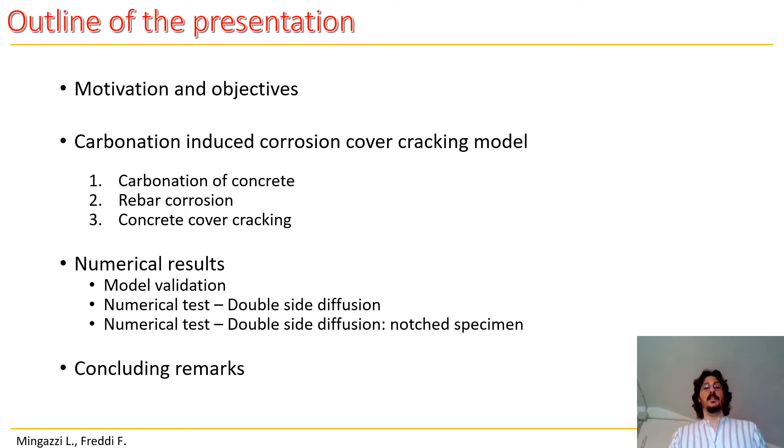We decided to focus on this topic because the corrosion of reinforcement bar is one, if not the most common, degradation phenomenon for reinforced concrete structures. Due to the corrosion process, the cross-section area of the rebar suffers a reduction, which translates into several safety issues that might arise in the structure, such as a reduction of the bearing capacity, a reduction of the ductility, and a reduction and/or complete loss of the bond between the concrete and the steel rebar.

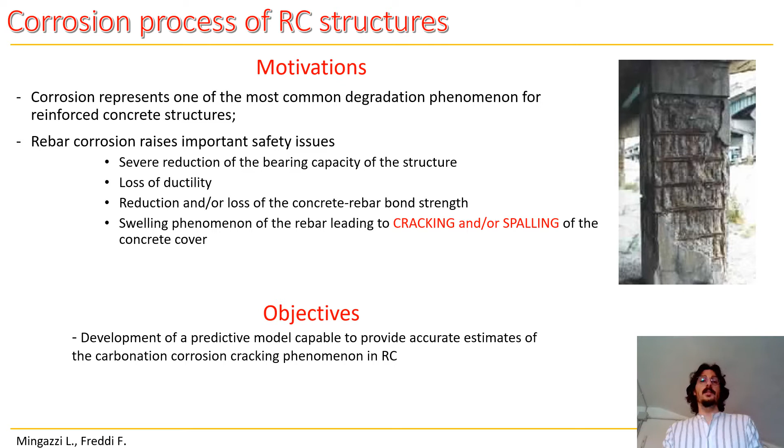Moreover, due to the formation of rust deposits around the reinforcement bars, a swelling phenomenon might happen, leading to cracking and spalling of the concrete cover. We decided to focus particularly on this last aspect, and we aim to develop a predictive model capable of providing accurate estimates of the carbonation-induced corrosion cover cracking problem for reinforced concrete structures.

The full phenomenon could be subdivided into three different phases. The first consists of the carbonation of the concrete, which happens due to the diffusion of pollutants present in the air into the concrete pores, which leads to a reduction of the value of the pH of the concrete, especially around the rebar.

This is a critical aspect, since the reduction of the pH leads to a depassivation of the steel rebars, and the corrosion process can start from the oxygen and water in the proximity of the reinforcement bars. Due to the corrosion process, rust deposits might form adjacent to the rebar and create a swelling phenomenon, which leads to overpressures in the surrounding concrete, which might suffer from cracking and spalling phenomena.

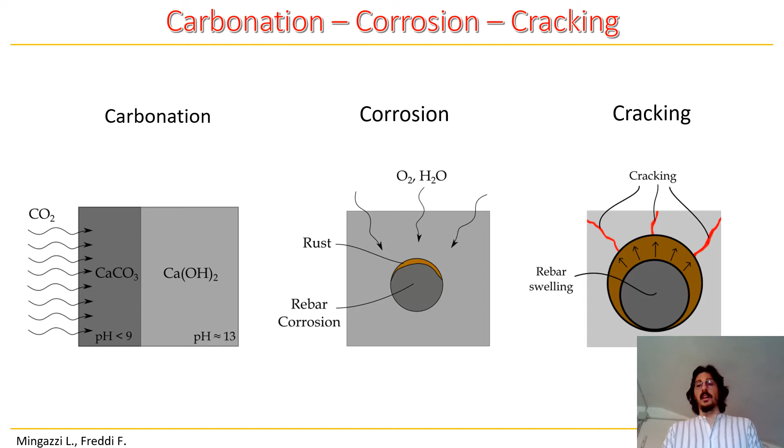The carbonation process takes place and starts with carbon dioxide diffusion within the concrete pores in gaseous form, and eventually it dissolves into the pore water as well as the calcium hydroxide present in the cement paste, and they react together to form calcium carbonate, according to the neutralization reaction reported in the presentation.

The calcium carbonate is, however, less soluble and occupies a larger volume compared to the calcium hydroxide, which leads to the phenomenon of pore clogging. Therefore, this translates into a lower porosity of the concrete, and a change in the mechanical properties of the concrete as well.

Moreover, the value of the pH is lowered, and once the carbonation front reaches the steel rebars, the depassivation of the steel rebars takes place as well.

In order to account for the changes in the material properties, we introduce the material modulation function, which is a function of the ratio between the current concentration of calcium hydroxide compared to the initial concentration.

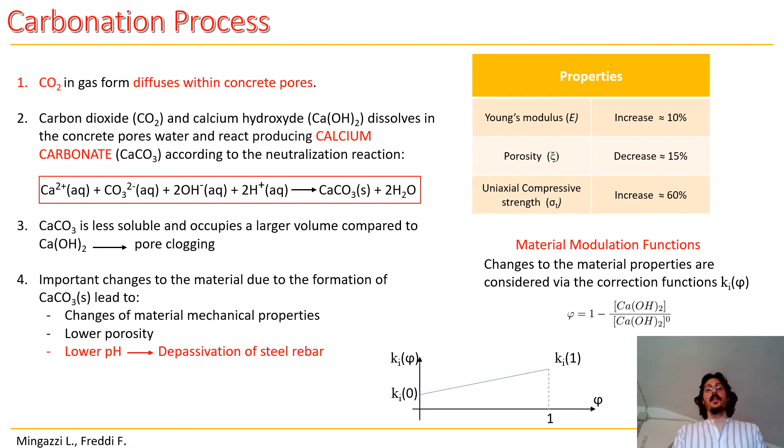The model for the carbonation process is based on the standard diffusion reaction equation system. For the carbon dioxide, the diffusion part is governed by Fick's law, with a diffusion coefficient which depends on the carbonation and the damage state of the material: the first to account for the change in porosity, and the second to account for the fact that CO2 can freely move through cracks in the material.

For the reaction part, the reaction rate is multiplied by the porosity and the volume fraction of the pores partially occupied by water, because it represents the actual condition in which the neutralization reaction takes place. For the calcium carbonate and the calcium hydroxide, we have only the reaction term. For calcium carbonate, it accounts for the formation of new material, while for calcium hydroxide, it accounts for its consumption during the reaction.

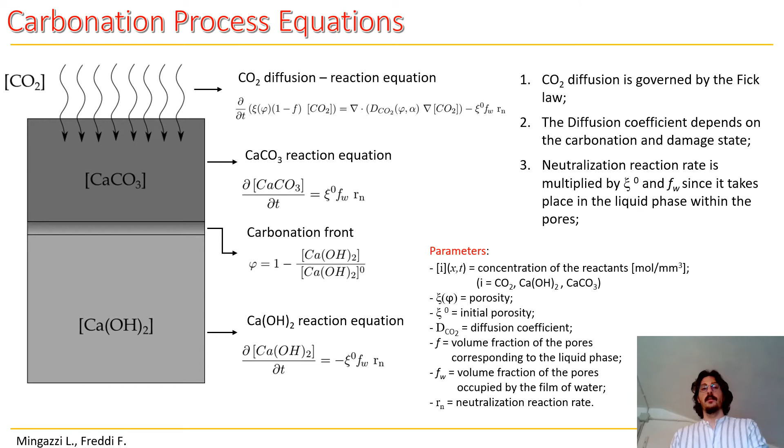Once the carbonation front reaches the reinforcement bars, the passive layer protecting the rebar from corrosion is lost, and therefore the corrosion process can start due to the presence in adjacent areas of oxygen and water.

The carbonation process leads to a generalized depassivation of the reinforcement bars, which translates into a generalized corrosion process. The corrosion process is characterized by two semi-reactions, one for the steel anode oxidation and the other for the oxygen cathode reduction, which when summed together provide the complete corrosion reaction.

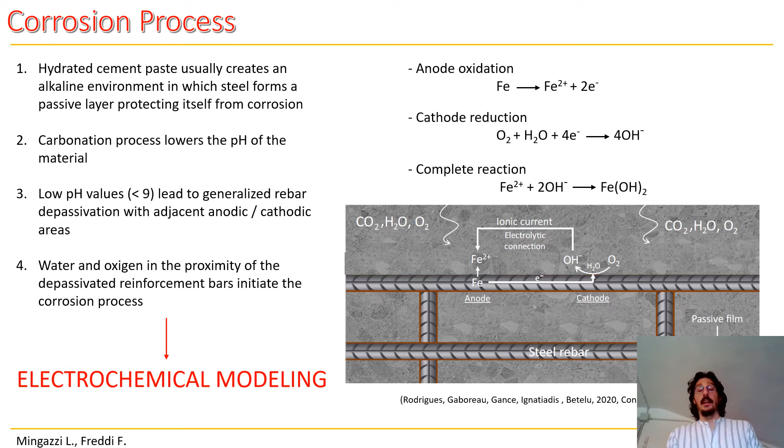In order to model the corrosion process, we adopted an electrochemical modeling approach. The electrochemical modeling is structured as follows: first, we calculate the electrical potential for each of the two semi-reactions via the Nernst equation. Once we have the two potentials, we can obtain the value of the corrosion current density using the Butler-Volmer equation.

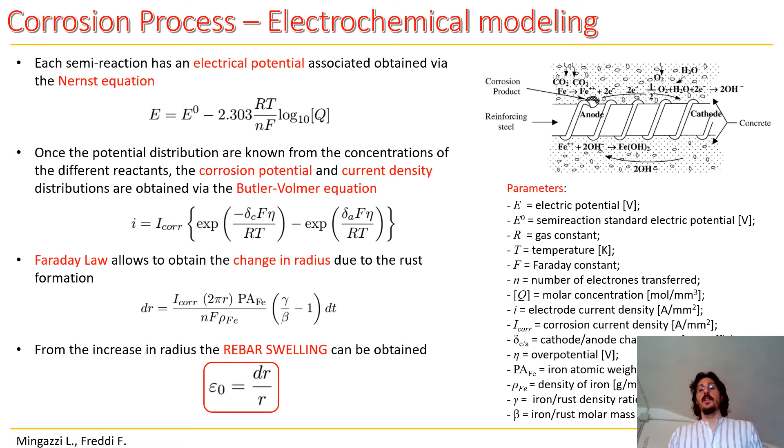Once the corrosion current density is known, it is possible to evaluate the change in radius due to the formation of the rust layer using Faraday's law. From the change in radius, we can then obtain the swelling associated with the rust deposits by dividing the change in radius by the value of the initial radius of the rebar.

Once the value of the swelling associated with the formation of rust deposits is known, we can proceed to describe and model the cracking or spalling phenomenon of the concrete cover, and we choose to approach this problem via the phase field approach for brittle fracture.

This is a variational approach based on the Griffith theory of fracture for brittle material, where damage represents a transition between the broken and unbroken areas of material and is represented using a scalar smooth field. Crack nucleation, formation, and evolution is described via the minimization of a two-field energy functional, which depends on the displacement field and on the damage field.

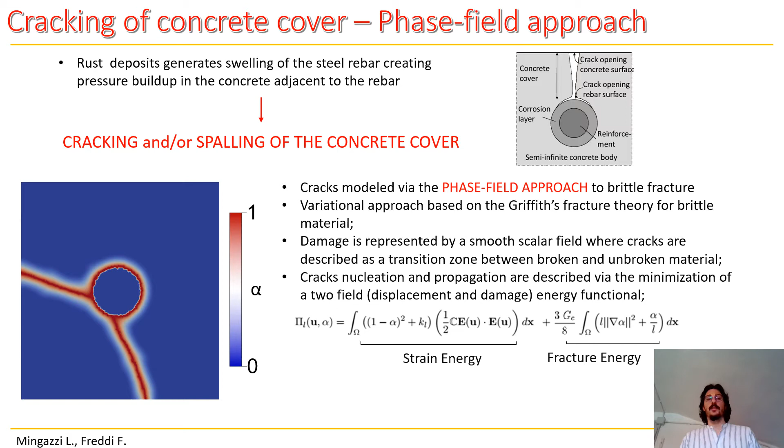In the phase field model we use to describe the formation of cracks within the concrete cover, we considered a traction compression energy split for the concrete strain energy, allowing the damage field and the evolution of damage to apply only into the areas under traction condition.

For the steel, for the rebar strain energy, we consider only the elastic part of the strain tensor. This permits us to introduce the swelling obtained from the corrosion process as a loading parameter.

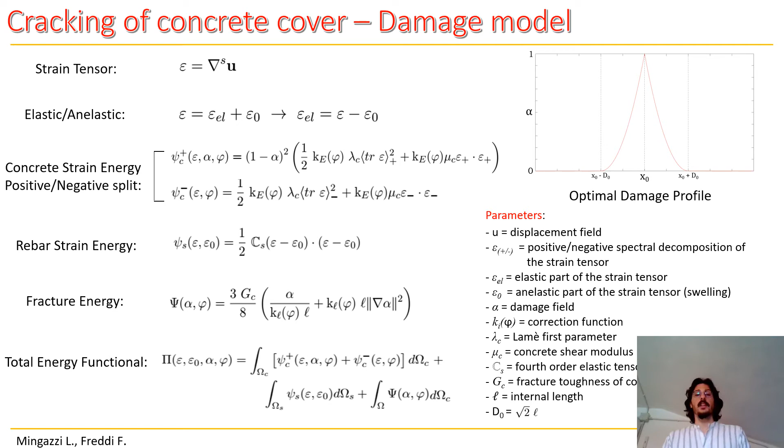It should be noted that for both the strain energies as well as for the fracture energy, material modulation functions are included in order to account for the changes in material properties due to the advance of the carbonation front. Lastly, the total energy functional is obtained as the sum of the different energy terms integrated over their respective domains. The complete numerical model is therefore structured as follows.

For every time increment, we solve first the carbonation problem, obtaining the carbonation profile and the value of the pH inside the concrete. If at any point around the rebar the pH is lower than 9, then we can solve for the corrosion process, obtaining the swelling associated with the rust formation around the rebar.

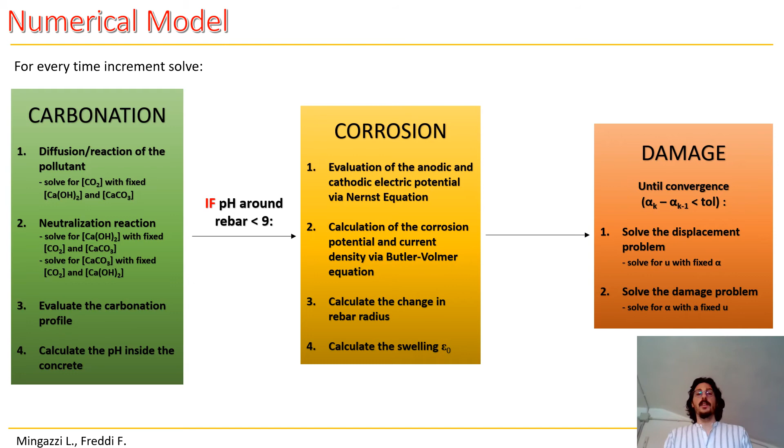And from the value of the swelling, we can move into the damage problem, obtaining the updated displacement and damage field associated with that swelling value.

Now into the numerical tests: we first proceeded with the model validation for both the carbonation and the corrosion process. As can be seen from the presentation, the numerical results we obtained are very close to the numerical results present in the literature, which are a good approximation of the experimental results.

For the corrosion, we also found that the values of the corrosion current densities for both the case of passive and depassivated steel rebars are in good agreement with the average values present in the literature.

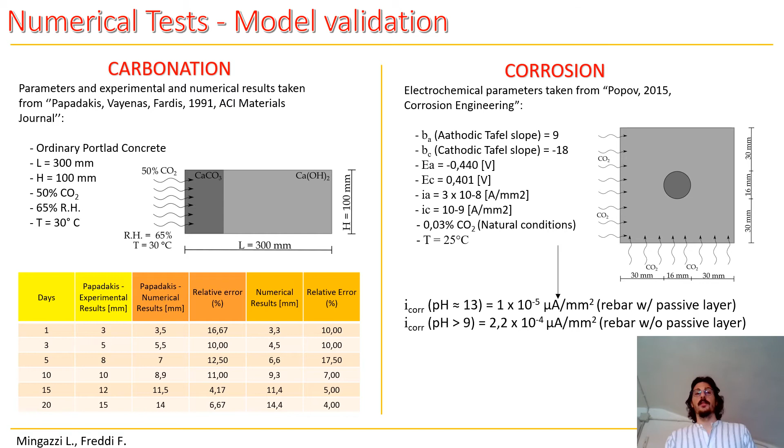The first numerical test we present is the double-side diffusion, in which we considered a squared specimen with a 16 millimeter diameter bar placed in the center, with a flux of carbon dioxide coming from the left and bottom side at a natural concentration, and the vertical displacements are blocked on the top side of the specimen, while the horizontal displacements are blocked on the right side of the specimen.

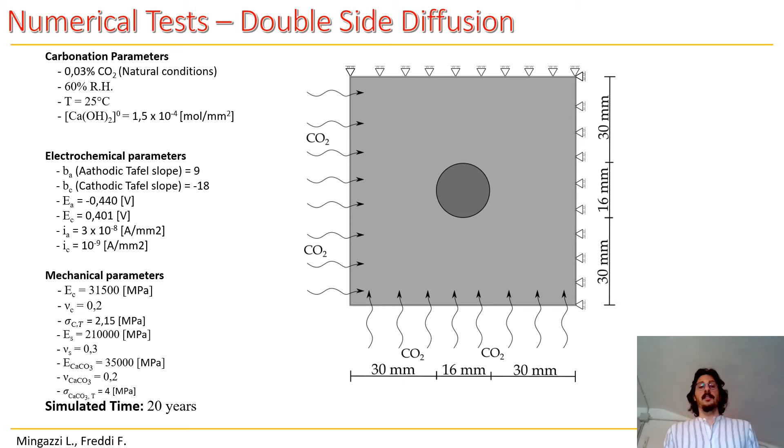The simulated time of this test is 20 years. The video reports the results for the double-side diffusion test we performed, and in particular we have on the left side the evolution of the concentration of carbon dioxide. On the central panel we have the carbonation profile, while on the right panel we have the damage field evolution.

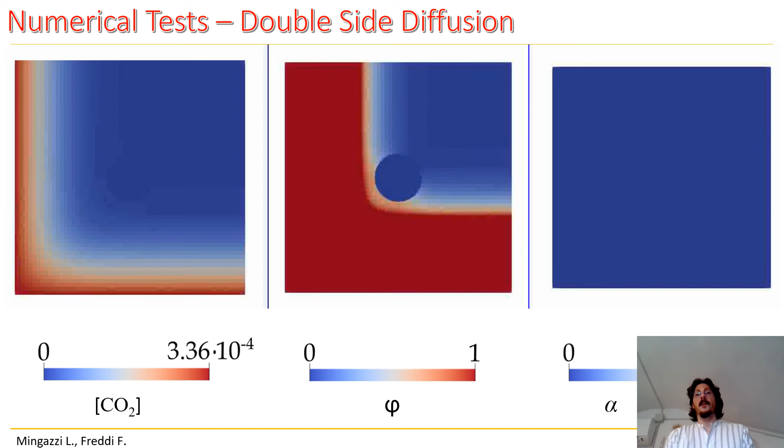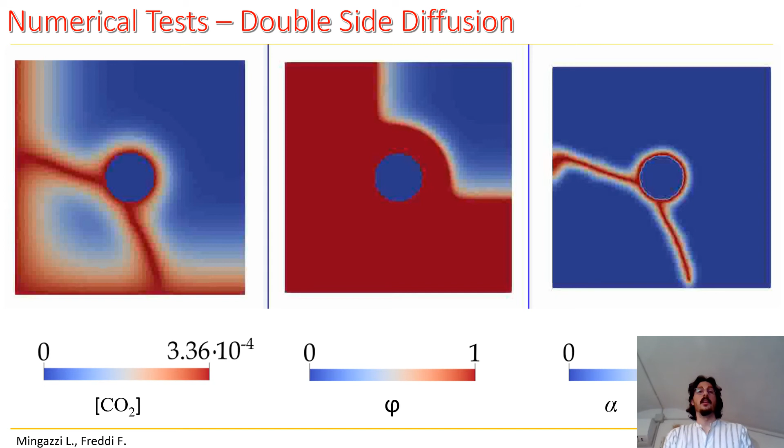It can be seen how the carbonation profiles actively affect the crack pattern, and especially when the carbonation profile reaches the steel rebar, damage nucleates and evolves toward the side from which the carbonation profile reaches the steel rebar, as these are the areas where the swelling of the rebar starts earlier.

For the second test, we considered the same geometry and initial conditions as well as boundary conditions of the previous experiment. However, we introduced a notch on the bottom side to evaluate the changes in the carbonation profiles as well as in the crack patterns that can be seen if pre-existing cracks or openings are present in concrete.

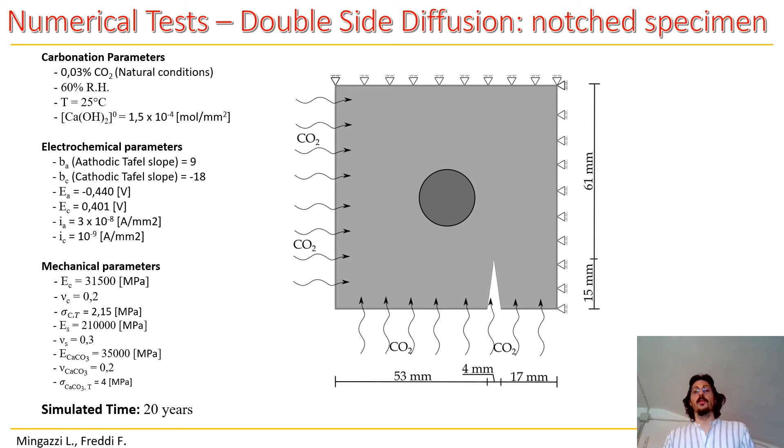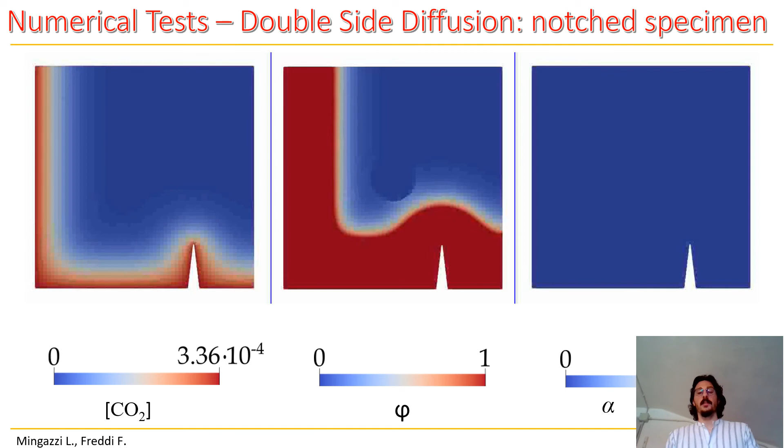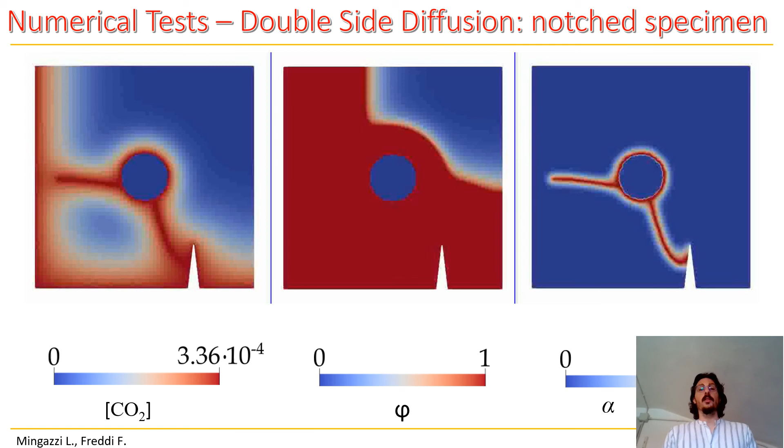In the second results, it can be seen that the carbonation profile changes accordingly to the new geometry, since the carbon dioxide can diffuse also from the notch. But most importantly, it can be seen the difference in the crack patterns derived by a different carbonation profile, since the presence of an opening changes the side from which the carbonation profile approaches the steel rebar, and the crack pattern which forms into the concrete cover reflects those changes.

Lastly, some concluding remarks on the developed model, which is capable of describing the complete process of the carbonation, corrosion, cracking phenomenon, and it catches also important aspects. For example, the effects of different environmental conditions. It accounts for different material property changes due to the carbonation process.

The rebar swelling is obtained as a function of the corrosion current density, and it is used as a loading parameter to obtain the solution of the displacement and damage field. The phase field method allows us to obtain crack patterns which actively reflect the different environmental conditions we set for the problem.

We're still working on this topic. However, we have to fine-tune the parameters to account for a wider variety of environmental scenarios, such as wet and dry cycles, etc.

We'd like to add a rust layer as an additional material between the steel and the concrete in order to account for its mechanical effects on the crack pattern. We'd like to add a limiting current parameter for the corrosion process.

And lastly, we'd like to extend our model to describe the pitting corrosion due to the chloride ion diffusion inside the concrete. That said, thank you for your attention.